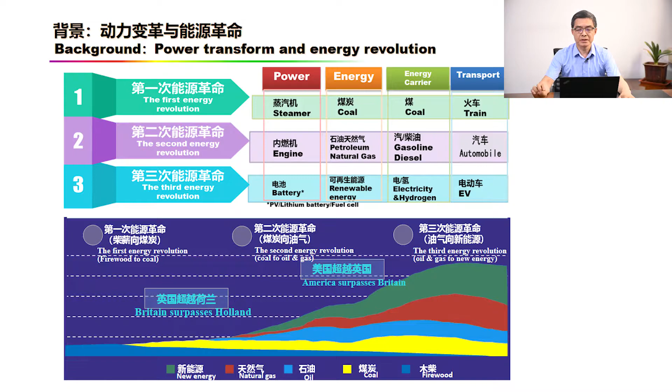As we all know, we have experienced two energy revolutions. The first one was the change from the use of wood to the use of coal, and the second energy revolution was about the change from coal to oil and gas. And now we are at the stage of a third energy revolution, which is the change from oil and gas to renewable energy. In the middle of this, our most important energy carrier will change from petrol and diesel to electricity and hydrogen.

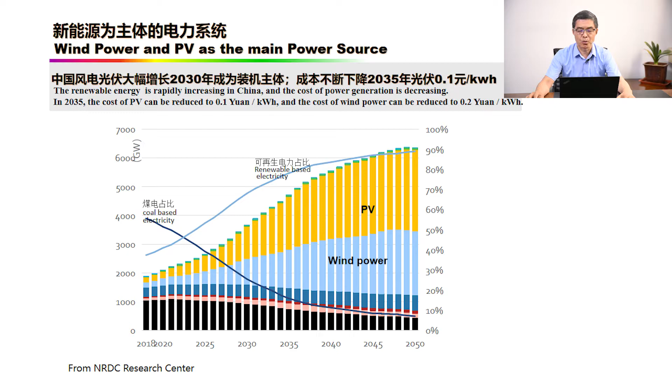So now we have new energy sources that will become the mainstay of the power system. In China, wind power and PV will grow significantly and will become the main installed capacity in 2030, while the cost of PV will also continue to fall, and in 2035 the cost of PV will be reduced to 0.1 renminbi per kilowatt hour. This is all about the increase in the proportion of renewable energy and a decrease of the proportion of carbon power and also the coal power.

So with renewable energy as the mainstay, we need to establish a new energy system that is oriented towards carbon neutrality, which is about achieving a new energy revolution. Chinese President Xi Jinping has already proposed a low carbon development goal for 2030 and 2060 in China, and also a major strategy for energy revolution. China's PV and wind power technologies and costs are now fully equipped for large-scale promotion. However, energy storage is the bottleneck and needs to be solved by batteries, hydrogen energy, and electric vehicles.

And in the middle of the new energy revolution, we have 5 pillars. The first is the transition to renewable energy, and second is the transition from a centralized to a distributed model, turning buildings into micro power plants. And most importantly, thirdly, it is about storage of intermittent energy with technologies such as hydrogen and batteries. The fourth is to develop energy internet technology. And finally, there is the use of electric vehicles, making them a terminal for energy use, storage, and energy return. So if we want to achieve a new energy revolution, we have to achieve the large-scale development of new energy vehicles. And only by achieving a new energy revolution can we successfully achieve China's goal of carbon neutrality.

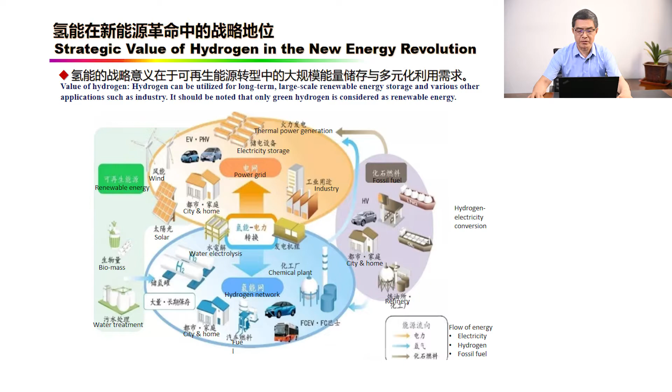So in this new energy revolution, hydrogen energy occupies an important strategic position. The strategic significance of hydrogen energy lies in its large-scale energy storage and diversified utilization needs in the transition to renewable energy. In other words, electricity is the mainstay, but at the same time, hydrogen is another energy carrier, which has diverse application needs.

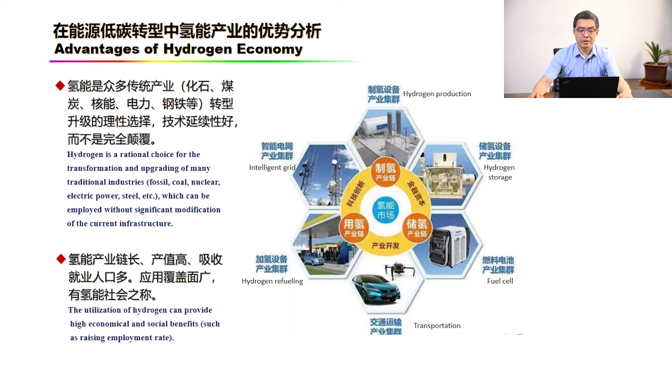At the same time, the hydrogen energy industry has potential advantages in the low carbon transition of energy. First off, hydrogen energy is ideal for the transformation and upgrading of many traditional industries, including fossil, coal, nuclear power, steel, etc. The technology has good continuity rather than complete disruption to the current infrastructure. At the same time, hydrogen energy has a long industrial chain, high production value, absorbs a large number of employed people, and has a wide application coverage. So we have a hydrogen energy society to support.

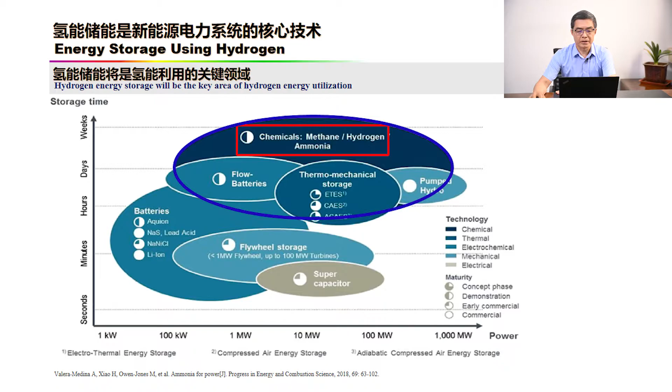First off, hydrogen energy transportation will be an important direction for electrification and carbon neutrality for long-distance heavy-duty transport. Hydrogen energy transportation is the pioneer field of hydrogen energy utilization, and its important mission is to drive the overall development of hydrogen energy. On the other hand, hydrogen energy storage is the core technology of new energy power systems. This graph shows the scale and duration of energy storage in our power system, from which we can see that hydrogen energy is one of the most important areas of energy storage, especially in long cycle and large scale scenarios.

So this is why hydrogen is the best way to store centralized renewable energy on a large scale and for a very long time. The reason is, firstly, the adequacy of use of energy. Large capacity and long duration storage models make fuller use of renewable electricity, and this can only be achieved through hydrogen. Secondly, the economy of large-scale energy storage. For stationary large-scale energy storage, hydrogen storage is more than an order of magnitude cheaper than battery storage.

Thirdly, it is complementary to the discharge of batteries, and it is a high-capacity, long-cycle, flexible energy source. Hydrogen can be used in fuel cells, gas turbines, power generation, and so on. And finally, the flexibility of the way hydrogen energy is transported and stored. It can be transported by long-tube trailers, pipelines, hydrogen blending, long-distance power transmission, local hydrogen production, and so on.

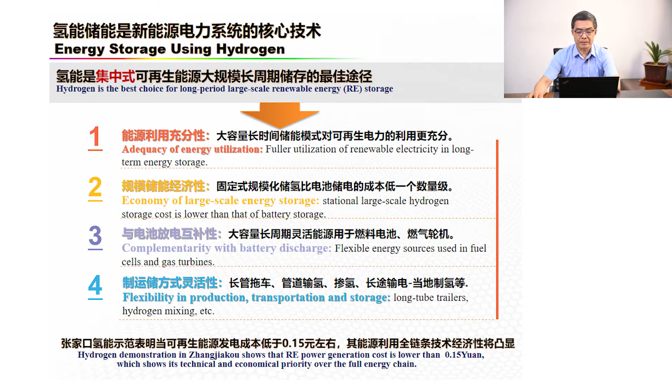So we think this is the best way to go. Our hydrogen demonstration in Zhangjiakou, China shows that when the cost of renewable energy generation is below 0.15 renminbi, the economics of the whole chain of energy use will emerge.

And then, from the point of view of achievement of a zero carbon economy, the demand of hydrogen energy in China is huge. It will increase from the current 25 million tons to over 81 million tons. And this is the first part of the demand of hydrogen energy in areas such as chemical raw materials, steel, cement, aviation, shipping, heavy road transport, and light road transport, etc. So we do need a large amount of hydrogen in those areas.

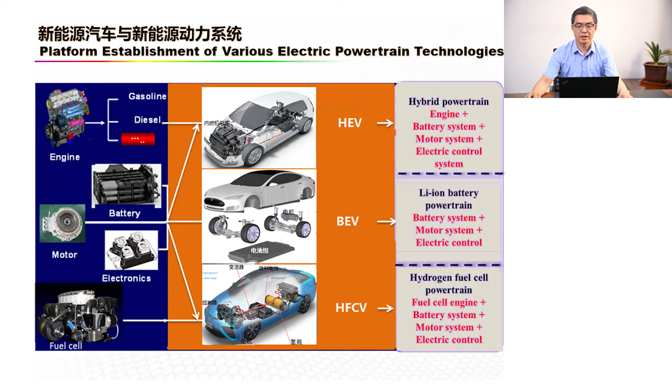And then in the second part, I would like to briefly introduce the progress of hydrogen fuel cell vehicles here in China. So we have three kinds of vehicles and three kinds of power systems for new energy vehicles, that is hybrid, pure electric, and fuel cell. And among them, fuel cell is one of the three types of new energy vehicle.

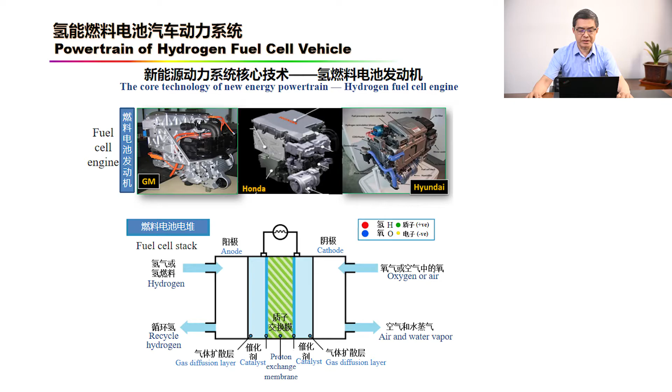The power system of the fuel cell vehicle is the fuel cell engine, which is similar to the internal combustion engine in terms of the peripherals of the system. However, in terms of the core energy conversion, it is similar to a battery, using electrochemical conversion.

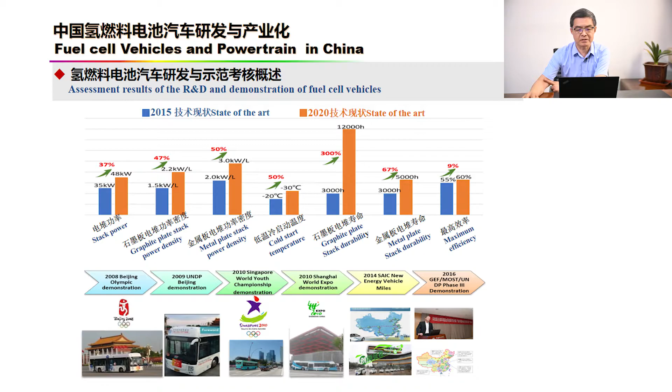And now, according to the statistics in 2020, China has promoted 6,500 fuel cell vehicles, basically all of which are fuel cell commercial vehicles. So China is the country with the most fuel cell commercial vehicles running on the streets in the world.

And then in terms of hydrogen energy infrastructure construction, by 2020, 74 hydrogen refilling stations have been built in China and 32 are under construction, making a total of over 100. And the main distribution areas are all over China. I would like to introduce some typical commercial vehicle products of fuel cells in China.

For example, a 12-meter fuel cell bus with a range of 700 kilometers, and also a reduced hydrogen consumption of 5 kilograms per 100 kilometers, which could compete with diesel vehicles, especially for operation in northern China cities. Heating in the winter time is entirely possible with fuel cells, and cost is more competitive compared to pure electric in winter.

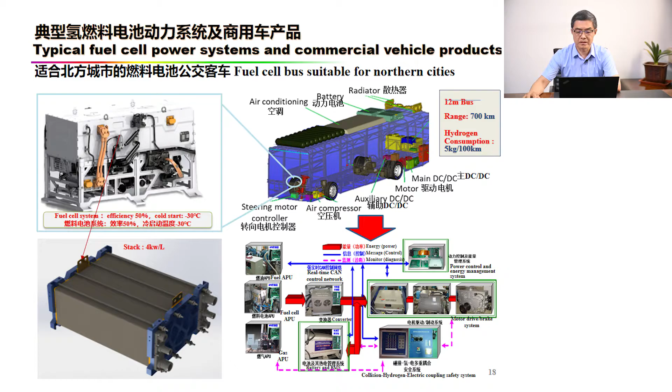This is a fuel cell engine, which is completely developed by China, and it has very good low temperature performance and can achieve a cold start at minus 30 degrees Celsius. This is the performance index of the stack, which is the power system of the whole fuel cell bus.

Another typical product is the fuel cell refrigerated vehicle. The fuel cell is also very suitable for refrigerated vehicles, which has a great advantage over pure electric vehicles.

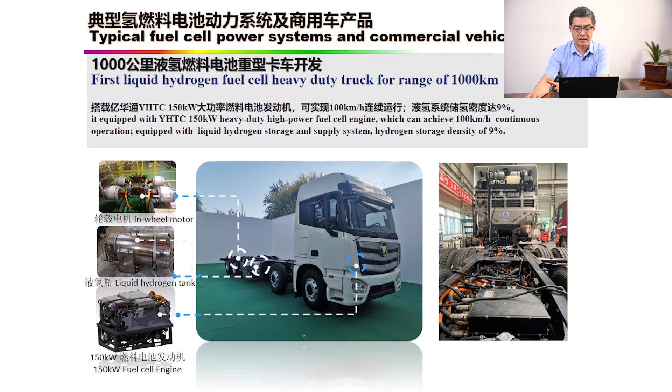Another product is the 1,000 kilometer range fuel cell heavy-duty truck with liquid hydrogen. This truck is driven by in-wheel motors, and the hydrogen is stored in a liquid hydrogen tank, using a high-powered fuel cell. And this vehicle is already available here in China.

And now we are preparing for a large-scale hydrogen demonstration at the Beijing Winter Olympics. During the Winter Olympics, there will be nearly 2,000 fuel cell vehicles operating in Zhangjiakou and Beijing, and over 20 hydrogen refilling stations in operation. And there are already 350 fuel cell buses in Zhangjiakou now.

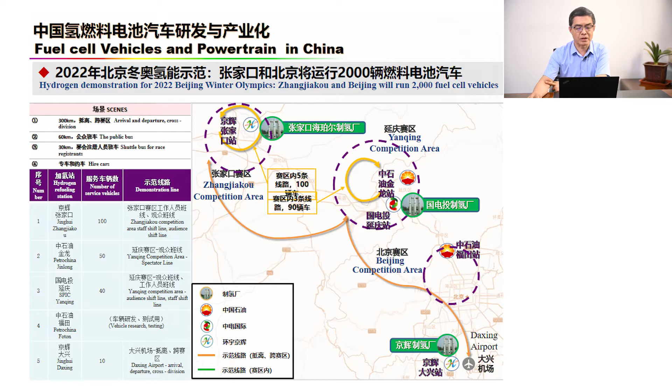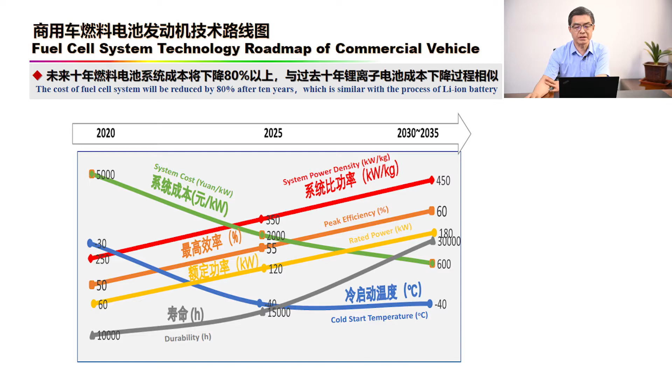Looking ahead, we have also developed a technology roadmap for fuel cells in commercial vehicles, and the cost of fuel cell systems in China will drop by more than 80% in the next 10 years. This is very similar to the process of cost reduction of lithium-ion batteries in China over the past decade.

And this is the 2020 version of the China Hydrogen and Fuel Cell Technology Roadmap developed by the China Society of Automotive Engineers. We expect that in 2025, China will promote 50,000 to 100,000 fuel cell vehicles, mainly commercial vehicles, and between 2030 and 2035, approximately 800,000 to 1 million fuel cell vehicles will be rolling out, mainly fuel cell heavy-duty long-distance commercial vehicles. So this is our overall plan, in all aspects, including the hydrogen refilling stations, which will exceed 5,000 by 2035.

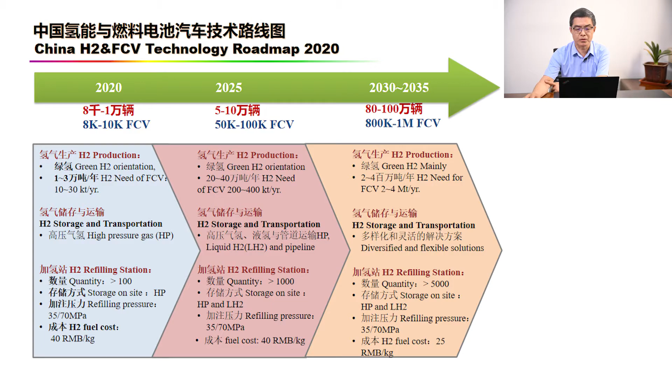And of course, we are still facing some technical challenges in fuel cell vehicles, such as the density of onboard hydrogen storage and the cost of hydrogen storage. In terms of fuel cell onboard hydrogen storage, our mainstream technology is still gaseous high pressure hydrogen storage.

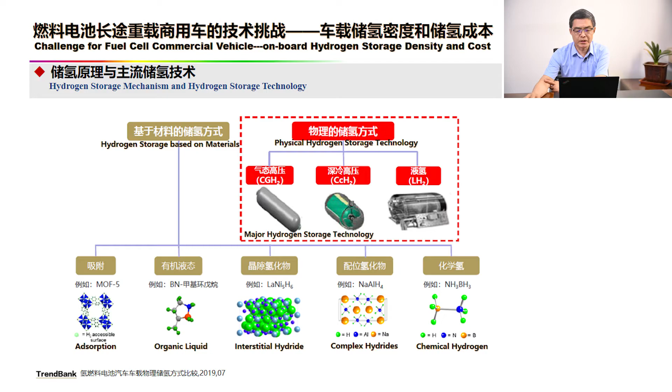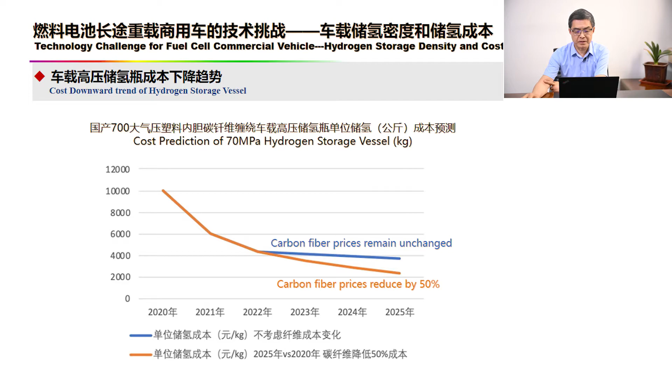However, the density of hydrogen storage is not very satisfactory, and cost is still very high. I'm talking about the current cost. And we expect the costs are going to be dropping continuously. However, in the middle of the total cost of our fuel cell vehicles, the cost of onboard hydrogen storage is still high, relatively speaking, mainly because of the cost of onboard hydrogen cylinder and carbon fiber. This is the second aspect.

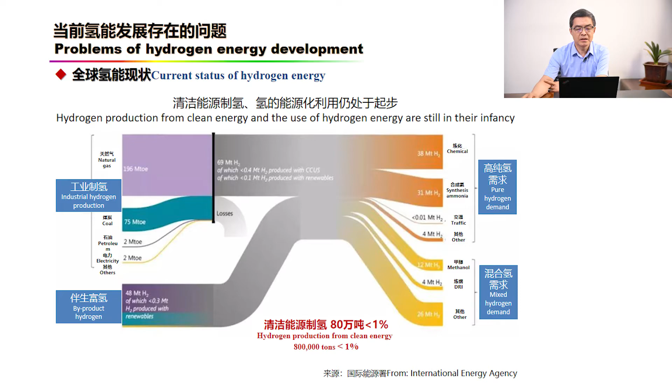And then the third aspect is the introduction of some of the technical economics of the whole hydrogen energy industry chain. And now the current global situation of hydrogen energy is that clean energy hydrogen production and the use of hydrogen for energy purposes is still in its infancy. For example, clean energy hydrogen production still accounts for less than 1% of total hydrogen production. Therefore, we must vigorously develop green hydrogen, i.e. hydrogen production based on renewable energy sources.

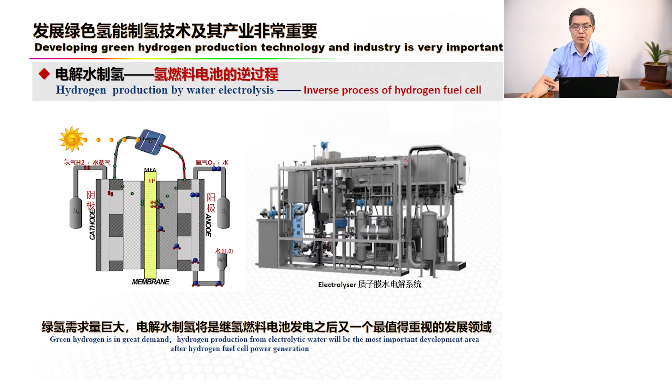And the core technology in hydrogen production is the electrolysis of water, which is the inverse process of hydrogen fuel cells. We believe that the future demand of hydrogen energy, especially green hydrogen, will be huge. Therefore, electrolysis water hydrogen production will be the next most important development area after hydrogen fuel cell power generation. And we believe that the electrolytic water to hydrogen system industry will be a high-tech industry many times larger than the fuel cell industry.

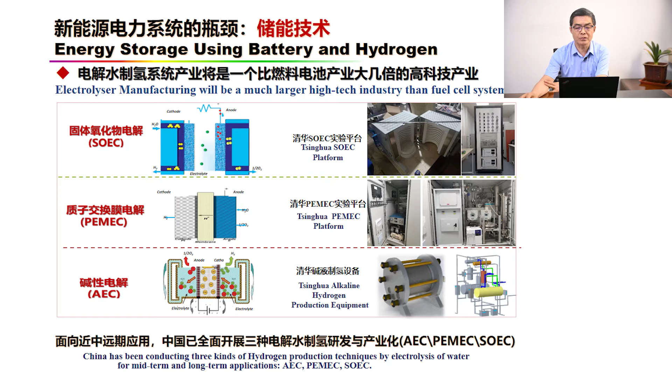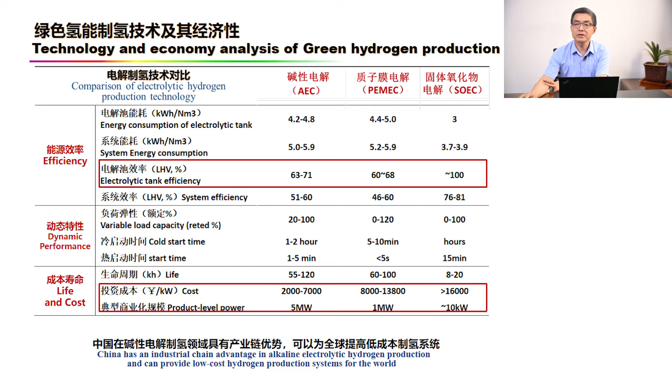So for near, medium, and long-term applications, China has fully developed and industrialized 3 types of electrolytic water to hydrogen technologies, including alkaline electrolysis, proton exchange membrane electrolysis, and solid oxide electrolysis. In the middle of this, we could see that the efficiency of the 3 electrolytic hydrogen production technologies is gradually increasing, but at present, alkaline electrolysis is still the mainstay in terms of the investment cost and typical commercialization scale. China has an industrial chain advantage in the field of alkaline electrolysis for hydrogen production and can provide a low-cost hydrogen production system for the world.

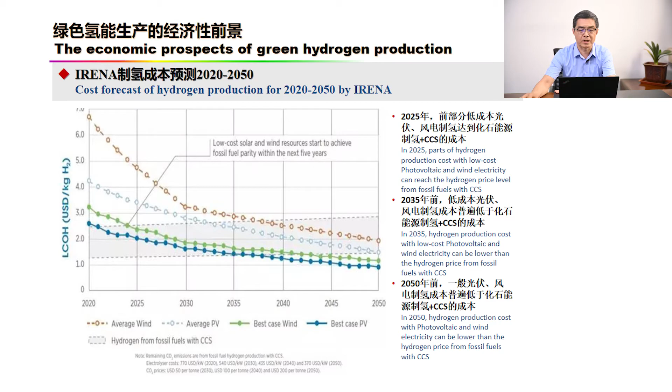Looking into the future, according to the International Renewable Energy Agency, we are predicting that the cost of hydrogen production will continue to fall, a trend that is also appropriate in China. We expect low-cost photovoltaic and wind energy sources, and soon hydrogen production costs will be comparable to traditional chemical-based hydrogen production costs by 2025 this year. So even after 2035, they will be lower than traditional chemical-based hydrogen production costs. So the outlook is very promising.

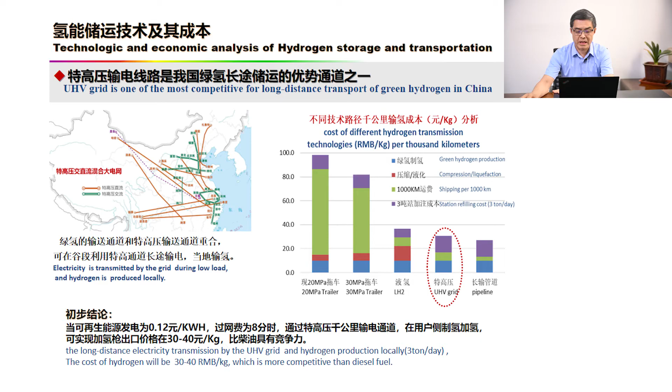And then in terms of hydrogen energy storage and transportation, in China, we have compared various different long-distance storage and transportation technologies over thousands of kilometers, including liquid hydrogen, gas hydrogen trailers, and so on. And we believe that the use of China's extra high voltage transmission lines for long-distance transmission and local hydrogen production is one of the advantageous channels for long-distance storage and transportation of green hydrogen. This is analysis of cost of transporting hydrogen over thousands of kilometers using China's ultra-high voltage transmission lines and local hydrogen production, which shows that this is quite competitive.

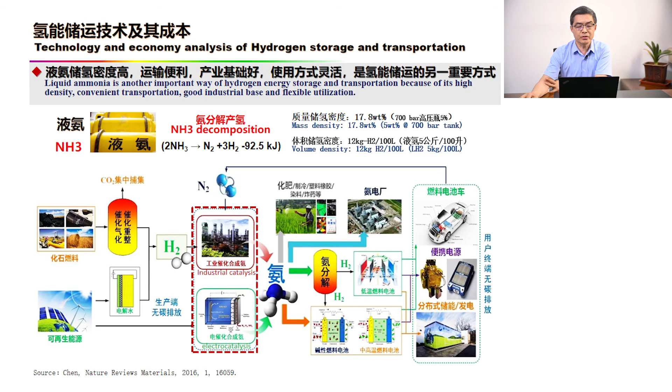So at the same time, the process of ammonia production, which currently has industrial catalysis to synthesize ammonia, which is very popular and mature in China, and then in the future, we have electrochemical, electrocatalytic synthesis. So there is a lot of potential in terms of technological process. And ammonia decomposition could also be used directly for power generation and also directly for fuel cells and so on. So it is a very good vehicle for hydrogen storage and transport and utilization.

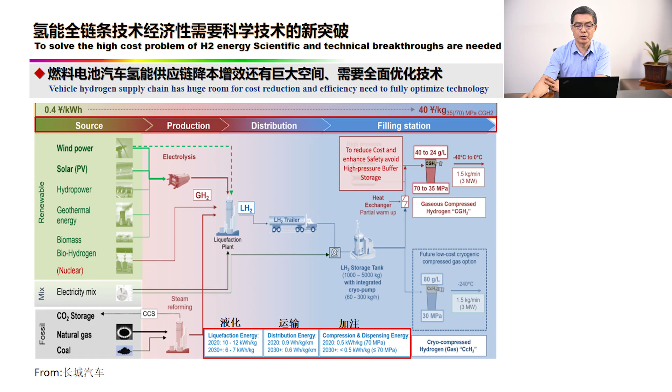So in terms of the whole chain, there is still huge scope of reducing costs and increasing efficiency in the hydrogen supply chain for fuel cell vehicles. So we need to optimize the technology across the board. For example, the energy consumption is still high for transportation and refilling. So we need a new breakthrough in science and technology across the whole chain.

Last but not least, I would like to make a conclusion. Hydrogen is the strategy and also strategic energy carrier to achieve global carbon neutrality, but the green hydrogen technology cannot yet fully meet the market demand economically. Facing the opportunities and challenges of hydrogen energy, international cooperation on hydrogen energy is urgently needed. The establishment of Beijing International Hydrogen Energy Center will build a platform for cooperation. Let us work together for the sustainable development of mankind.